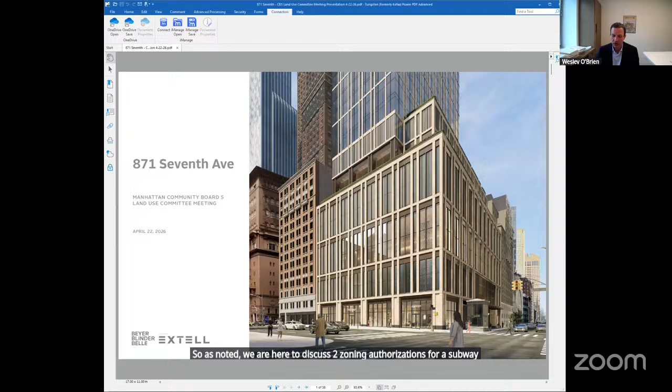So as noted, we are here to discuss two zoning authorizations for a subway improvement bonus to facilitate the construction of a mixed-use hotel, retail, and residential project at 871 7th Avenue, former Wellington Hotel site.

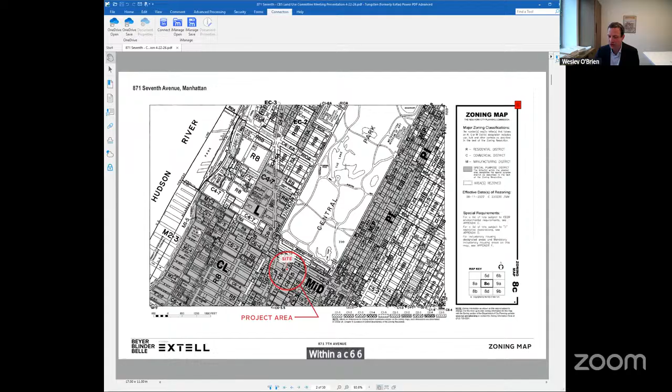The site is located at the northeast corner of the intersection of West 55th Street and 7th Avenue within a C6-6 zoning district within the Theater Subdistrict of Special Midtown. The site is outlined here in red, and it's part of a broader zoning lot outlined in blue that includes portions extending into the mid-block C6-6.5 district.

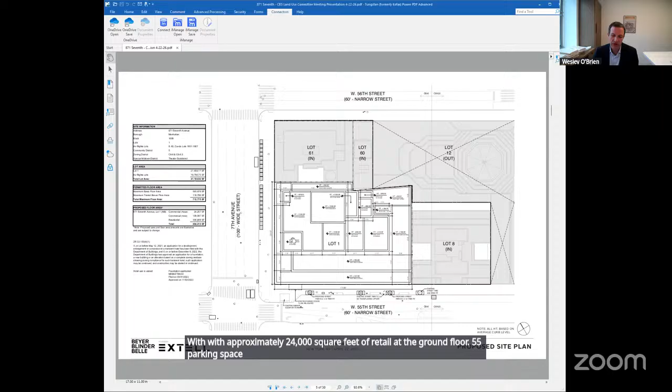We have a site plan here. The development site is shown in white at Lot 1, with the remainder of the zoning lot shown as Lots 8, 60, and 61. The proposed project will be a 484,000 square foot mixed-use building with approximately 24,000 square feet of retail at the ground floor, 55 parking spaces at the second floor level, 159,000 square feet of hotel use in the lower portions of the building, about 156 rooms, and 301,000 square feet of residential use in the upper floors, approximately 130 units. I'll pass it to Max to describe the project program in more detail.

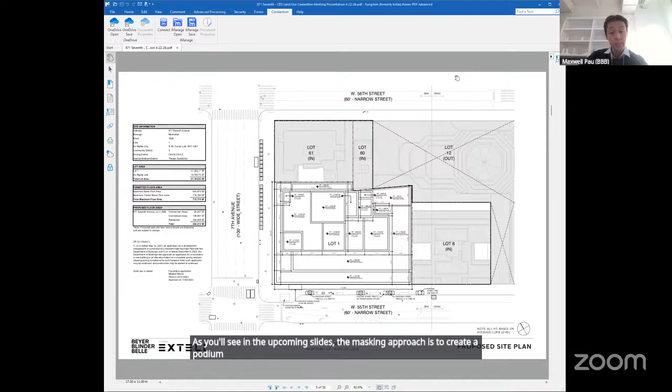As you'll see in the upcoming slides, the massing approach is to create a podium at the street wall that relates to the buildings directly around us, and then shift the upper portion of the building to the west towards 7th Avenue and away from 55th Street. Let's go to the next slide.

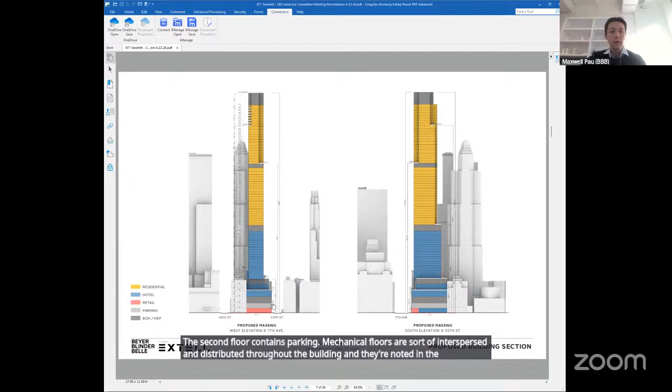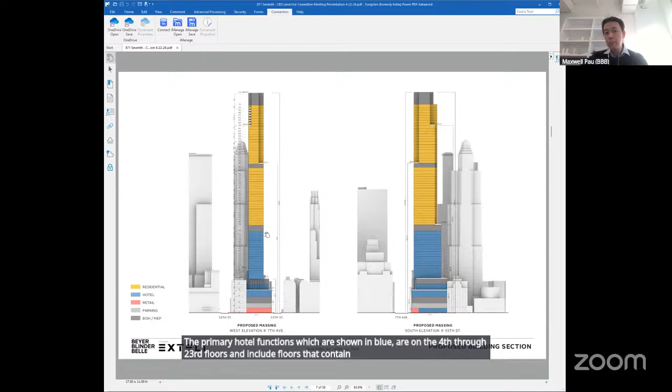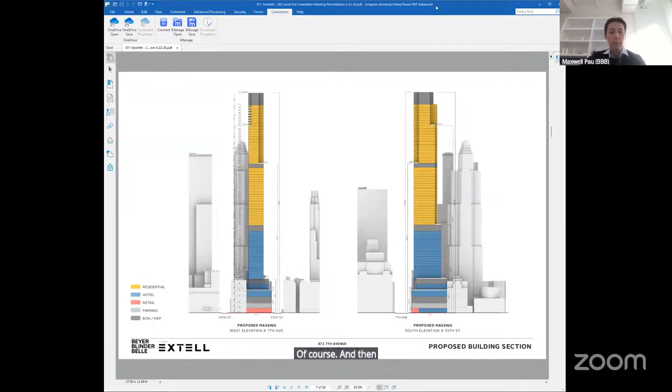Mechanical floors are interspersed and distributed throughout the building, noted in dark gray. The primary hotel functions, shown in blue, are on the 4th through 23rd floors, including ballrooms, meeting space, upper lobbies, amenities, food and beverage spaces, and hotel rooms. Above the blue hotel stack, residential uses run from the 25th to 70th floors in yellow, including amenities on the 47th floor. The overall building height, including the bulkhead shown in gray at the top, is approximately 1,050 feet.

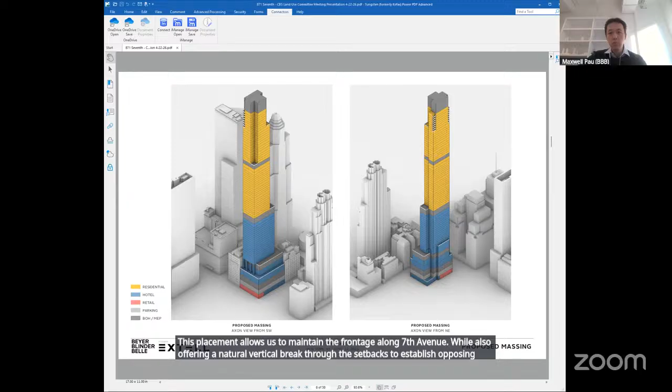Next slide. Showing the same stacking in axonometric form, we can see the building massing and how it steps in as it rises into a rectangular form. This allows us to utilize all of the setback roofs as outdoor space as the building steps back and goes up. The main building mass steps back from 7th Avenue 10 feet, steps back from 55th Street approximately 40 feet, and steps away from the easterly property line by 50 feet on the residential levels. This placement allows us to maintain the frontage along 7th Avenue while offering a natural vertical break through the setbacks to establish a podium relating to the height and massing of existing buildings to the north and east along the street line, as shown in the diagram on the left.

Next slide. We can see this podium relationship a little better in this view on the corner of 7th Avenue and 55th Street. Our design intent is to create a crisp, contemporary, and timeless building for today and its uses, one that has order and a bit of refined restraint in its articulation.

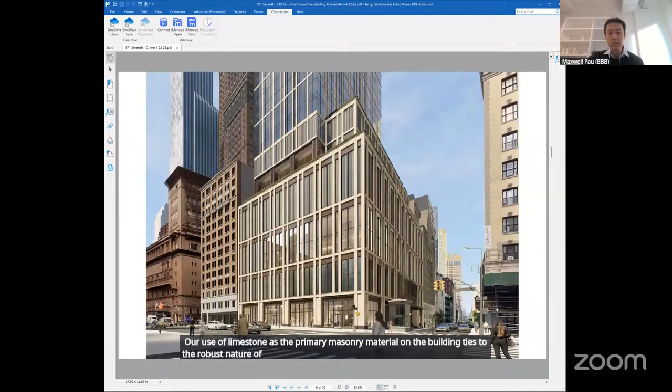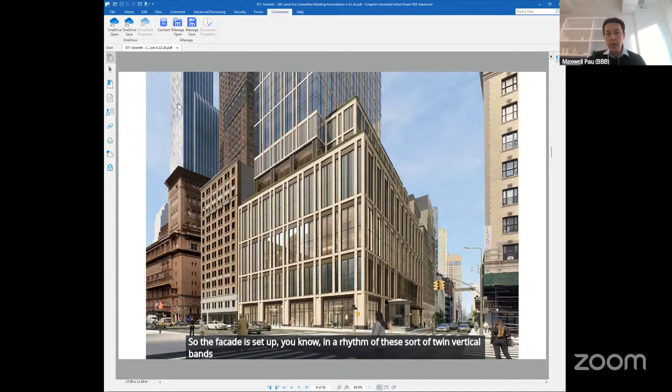Our use of limestone as the primary masonry material ties to the robust nature of the buildings around us and picks up the warmth and tonality of the stone and brick buildings directly adjacent to us. The facade is set up in a rhythm of twin vertical bands with horizontal banding that rise up the building from the base, with a higher density of limestone at the base balanced against maintaining windows and transparency, which we think is really important. We blend that warmth of the limestone with bronze-colored metal accents at the storefronts, with some of that materiality carrying up the building on the amenity levels.

As discussed, turning now to the zoning actions, we are seeking 2 zoning authorizations. First, to grant a 118,000 square foot bonus in connection with subway station improvements, which we will discuss in more detail. Secondly, we are seeking an authorization to modify bulk regulations, specifically to modify the daylight compensation requirements, and to allow for 18,000 square feet of floor area generated in the C6-6.5 district to be transferred into the C6-6 district portion of the site.

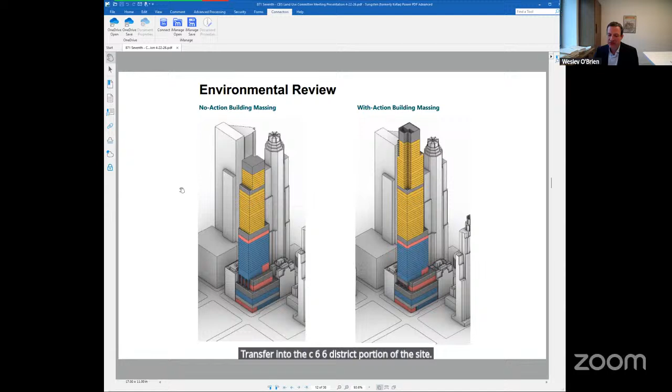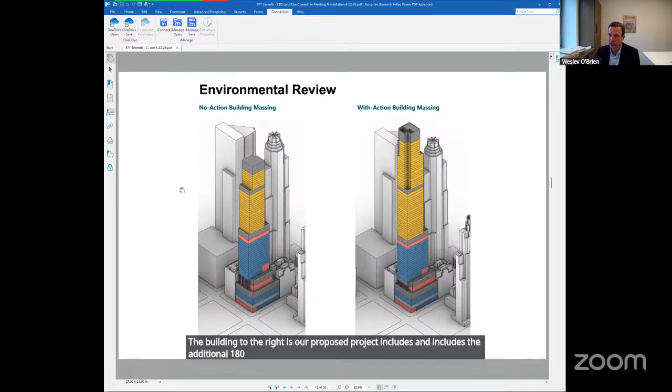An environmental assessment was prepared to study the potential impacts of the authorizations we are seeking. The building shown to the left is what can be built entirely as-of-right, without the authorizations. The building to the right is our proposed project, including the additional 118,000 square feet, the 20% bonus. The environmental assessment compared these two buildings, considered the effects, and confirmed that the actions would not result in any significant adverse environmental impacts.

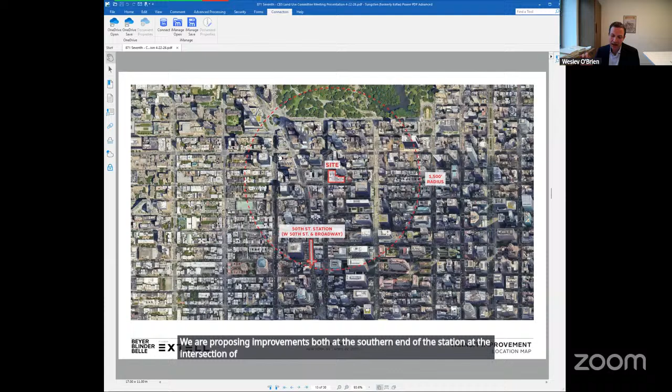Focusing now on the subway improvements, you can see the project site in the center of the circle, and the station at 50th and Broadway, which is within 1,500 feet of the project. We are proposing improvements both at the southern end of the station at the intersection of Broadway and 50th, and at the northern end at the intersection of Broadway and 51st.

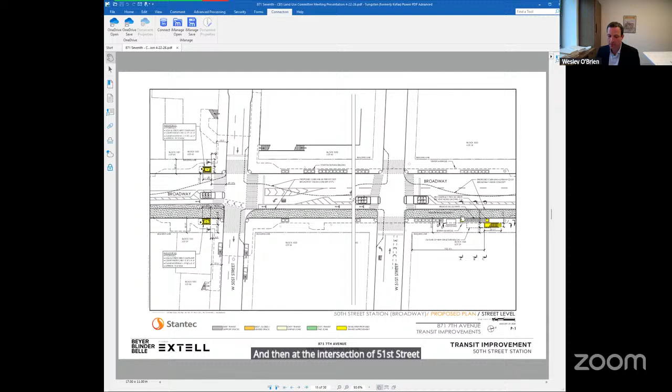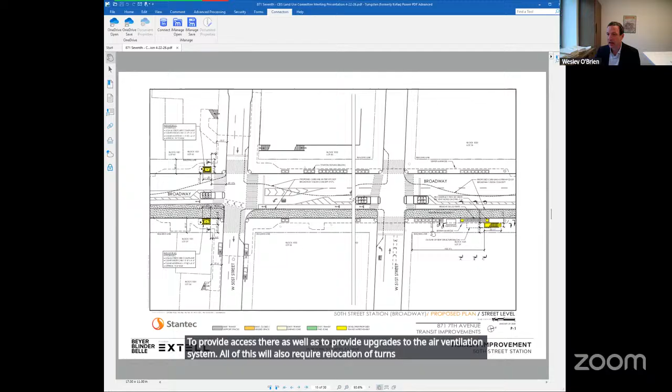This slide shows the improvements we're proposing at ground level in yellow. We're proposing a new elevator to access from the street to the platform at the northbound side, and another elevator to provide access from the street to the southbound platform. Then at the intersection of 51st Street, the northern end of the platform, we're proposing new stairs to provide access, as well as upgrades to the air ventilation system. All of this will also require relocation of turnstiles and construction of elevator machine rooms.

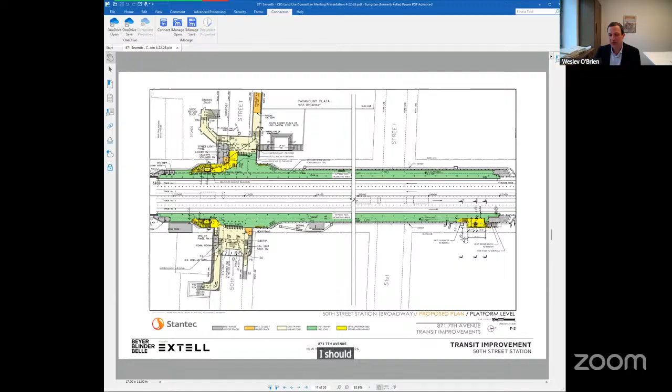I should note that as a result of this work, the station would become handicap accessible. An additional point, although this element is not technically part of the bonus, I will note that the project is also providing on-site station improvements.

You can see here the 57th Street subway station entrance for the N, Q, R, and W. This station is already accessible, with a new elevator shown at the left. However, there's a pinch point where two gentlemen are walking, right in the middle between the elevator and the stairs. So as part of the project, that stair will be moved into the property line, thereby preserving the full width of the sidewalk for pedestrians.

That is our proposal, and with that, we're happy to take any questions. Thank you. Yaron, would you like to lead us off?

I'll start. Can you give us a sense of how many stories this 20% bonus translates to? Like what does it roughly make up in stories? Sure, the as-of-right project would be 53 stories, and the proposed project is 71 stories. So 18 stories, thereabout.

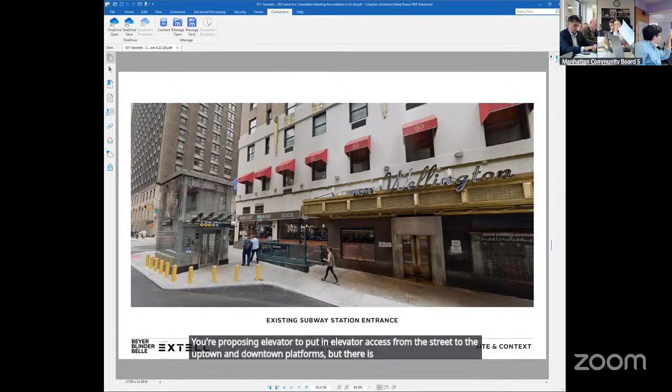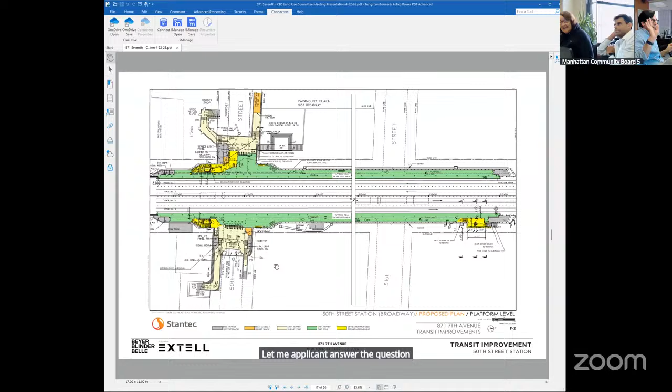You're proposing to put in elevator access from the street to the uptown and downtown platforms, but there is already an elevator? No, for the station. Sorry, that's for the one train. Okay, sorry, got it, understood. Thank you. Right, let the applicant answer the question. No, it was a stupid question. I appreciate everyone telling me. Applicant's job, not us, not in the room.

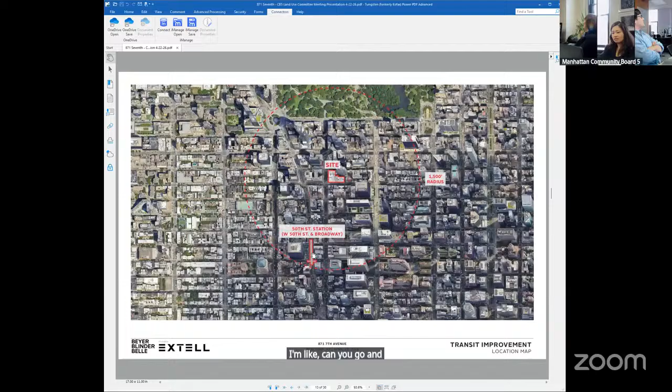Can you go to the bottom floor design that you showed, or the street level? The bottom floor site plan or the street level view? Floor plan, yeah. Oh, that, there we are. The one that has, sorry, that one, yes.

So if we're looking at this correctly, there are three curb cutouts here, one for the loading dock and two for the driveway, in very close proximity to each other. Can you talk through why, or your thoughts around that, and any potential there might be for disruption to the pedestrian experience with that?

Sure, Max, do you want to take the initial point? Sure. So the driveway curb cuts for the vehicular entrances are one-way curb cuts, about 14 feet long, so we're trying to limit that. One of the things we looked at early on was a two-way curb cut, but we were concerned about potential conflict, since there's more movement with two-way. You'll notice the movement is in a clockwise direction, which is a little counterintuitive, but working it through with our traffic engineers, this was the safer approach, because the ingress movement with the street going westerly on 55th meant there was a direct sight line to people going in and out of the subway station stairs. So the idea was to have the ingress come in on the west side and the egress come out on the east side, further from the subway station. The curb cuts are 14 feet one way, and the loading curb cut is slightly wider to meet zoning requirements.

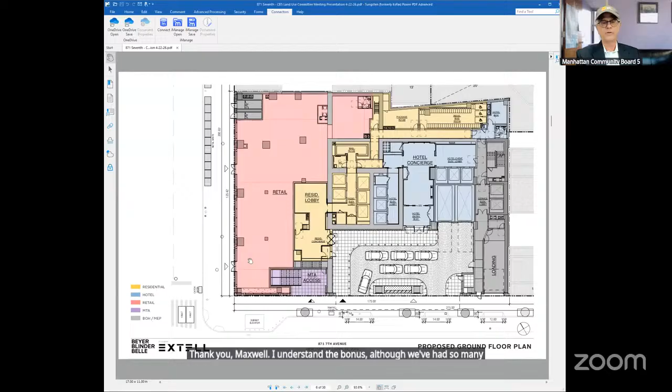That technically is not part of the bonus, but that is a public benefit. Thank you. I understand the bonus, although we've had so many problems with these bonuses when it comes to elevators with private developers. They put them in and then they go into disrepair and are out of service sometimes a month at a time. But the question I'm asking is not about the bonus. I'm asking whether there is any space within the project for community or public use. No, beyond the MTA space, there's not further public space.

Other questions from the committee? Mike? To ask about the hotel portion, you said there was a ballroom. How big is the ballroom? Or is there any other meeting space available?

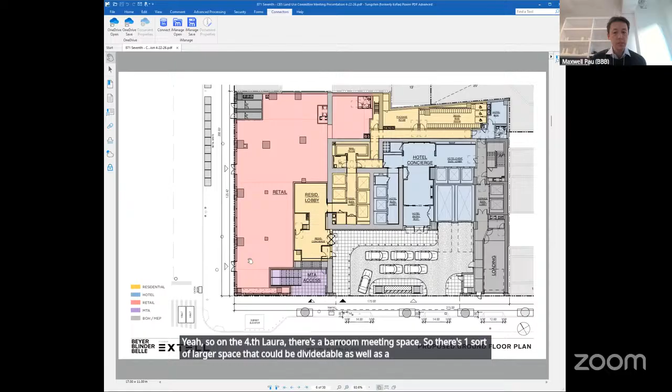Yeah, so on the fourth floor, there's a ballroom and meeting space. There's one larger space that could be dividable, as well as a couple of meeting spaces on that level, or sorry, the third floor. And the ballroom, I believe, is around 3,400 square feet. 3,400? That's what you said?

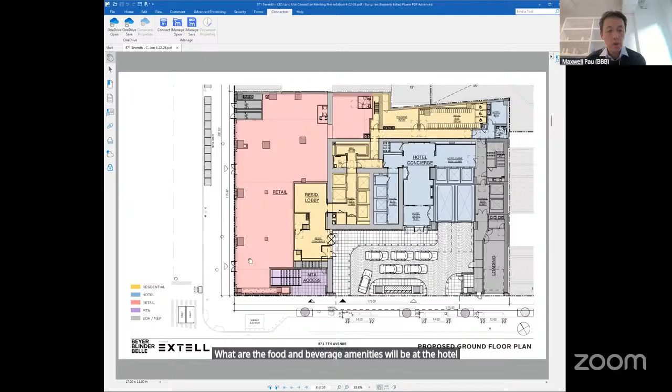Yes, he said that. Okay, and you said there was other food and beverage. Is there a restaurant or what other food and beverage amenities will be at the hotel? Yeah, there will be food and beverage spaces associated with the hotel that you would typically find in a lobby area. So that's within the hotel portion that was in blue.

Okay, so just a lobby, grab and go, is that what you're talking about? No, there'll be a restaurant on the 5th floor. How large is the restaurant on the 5th floor? Let me check. It's about 2,200 square feet. Okay.

That's it. Any other, Murnau? Who will be in charge of maintaining the elevator on the 50th Street station? MTA will be in charge of maintaining it. Extell will pay them an amount in order to fund that maintenance work. On an ongoing basis? Yes. And do you know how much that amount is? Has that been negotiated already? It is not set at this point.

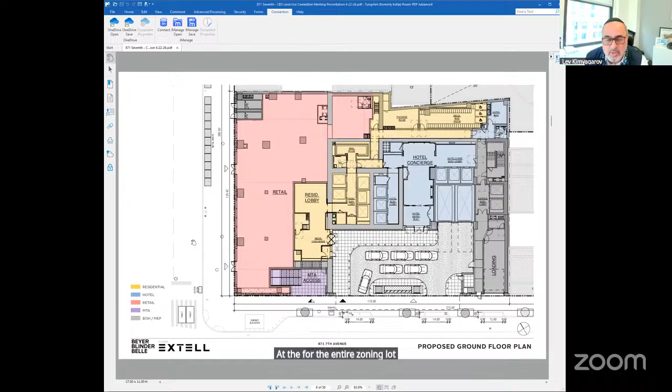And how big is the zoning lot? The zoning lot is 41,104 square feet. Okay, good. Mike, you wanted to ask another question? And the property is how many square feet? So the zoning lot, does it include adjacent properties? It does. The development site is 21,400 square feet. You see lot 1, and the zoning lot additionally includes lot 8, 60, and 61. And that equates to 41,000 square feet. Correct. Got it, okay.

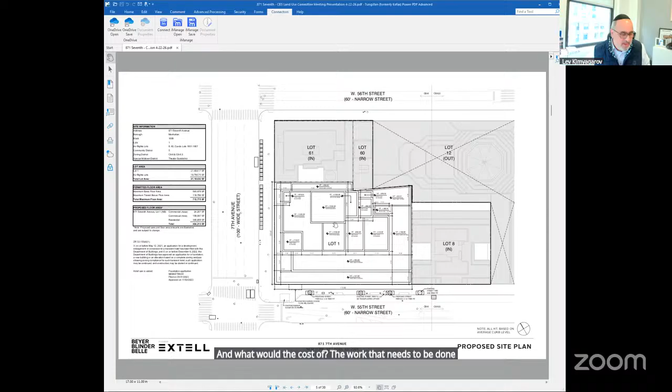And what would the cost of the work that needs to be done with MTA? Have you guys got a number? I'm just curious. No, we do not have the number yet. Got it.

Anything else, Lev? No. Okay, Michael. I want to add something. I like the fact they're moving the entrance of the subway into their building. I think that's pretty nice. Okay, Lev, we'll come to comments later, this is just questions for now.

Michael, question. The subway entrance on 55th Street, what is the current width of the stair now, and what is the proposed width of the stair that will be inside the property line?

It will be 9.5 feet. I don't believe I have the existing width, but it's comparable. 9.5 feet wide? Yes. Okay.

Do you want sort of questions? Any other questions from the committee? Well, don't do Kevin's question. Kevin is on the board, so Kevin can participate in business session. Kevin, do you have a question? Yeah, just I have a question.

Will the developer receive a tax credit as part of this exchange for the bonus floor area for the transit improvements? And if so, what is the value of the tax credit? No, at least not that I'm aware of.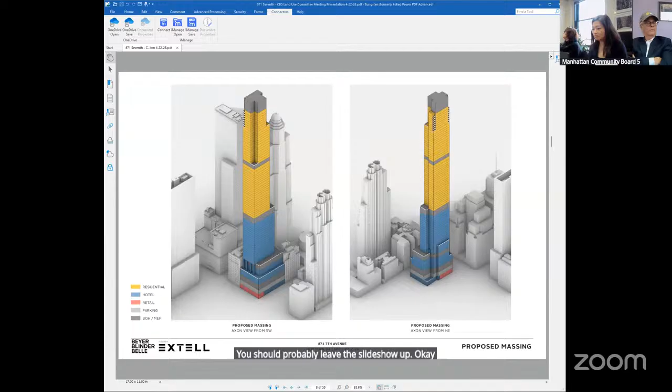Can you see that screen? All right, so the base of the building -- can you show the slide, please? Sure, I'm pulling it up. Great, thanks. You should probably leave the slideshow up until we're finished. Thank you. So the base of the building -- the first setback happens roughly after the fourth floor, but the base of the building really goes up to 6.

Okay, so the base takes up as far as the front and its relationship to the sidewalk -- there's no setback from the existing in the base, except for that area to get into the subway or the covered area to get into the building on 55th Street, correct? Correct.

Okay, so that was a question. So that's 6 floors. It looks taller.

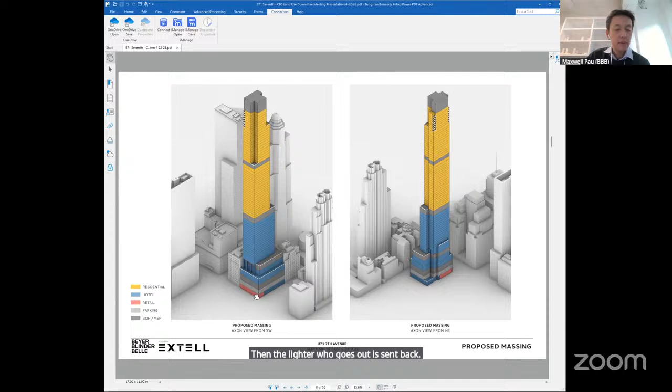It is 6 floors. Then the lighter blue is set back how much? I'm sorry, can you repeat that? Okay, the lighter blue section -- is set back how much from the darker blue, from the bottom section? So presumably that's where the restaurant is and you'll have a terrace and all that, correct?

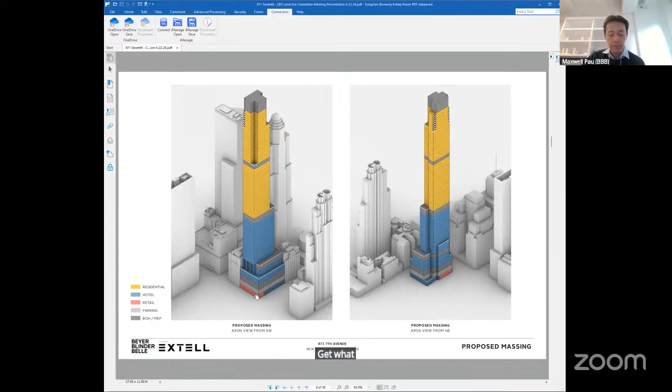Yeah, so we've got the tower portion relative to the street line at 40 feet on 55th Street. 40 feet. And it's 40 feet back from 55th Street.

And what about from the building to the east of that, which happens to be where I live? And does it go to the lot line? Yes, the podium goes to the lot line. So those 6 stories go to the lot line.

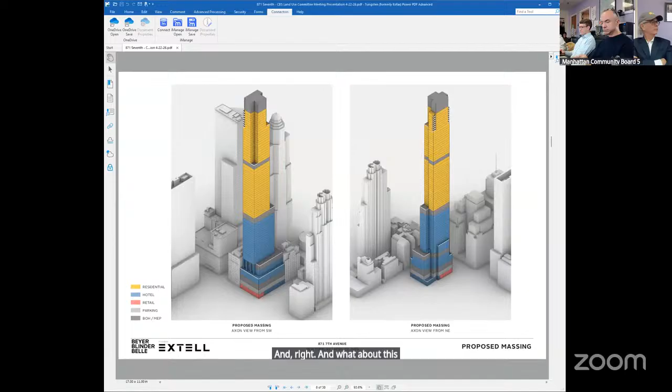And what about the next, the lighter blue, the royal blue, where the setback is? Yeah, so that sets back another approximately 29 feet. Okay, does that go to the lot line? It sets back 29 feet from the lot line. Oh, from the front and the side? From the side -- the setback building to the lot line is 29 feet. There's some crosstalk here, so ask your question.

My question is, where do the setbacks occur and how many are there? Can you just run through that through the whole building? Sure, I think this might be an easier diagram here.

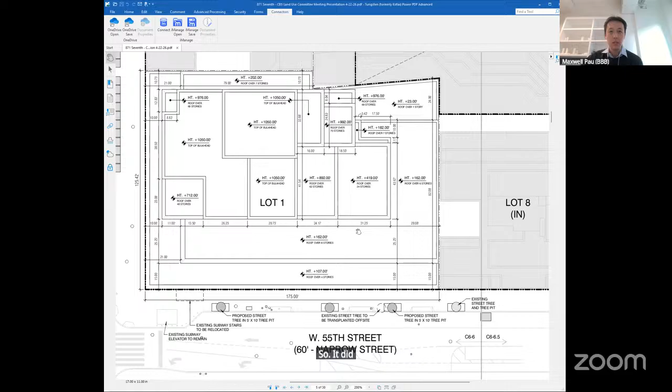So if we're going from the eastern lot line, you point that out, Wesley. So that first setback above the 6th floor is just a shade over 29 feet. Then that next setback to the residential portion, the yellow portion, is another 31.23 feet. So it adds up to the dimension. Okay, no, that answered that question.

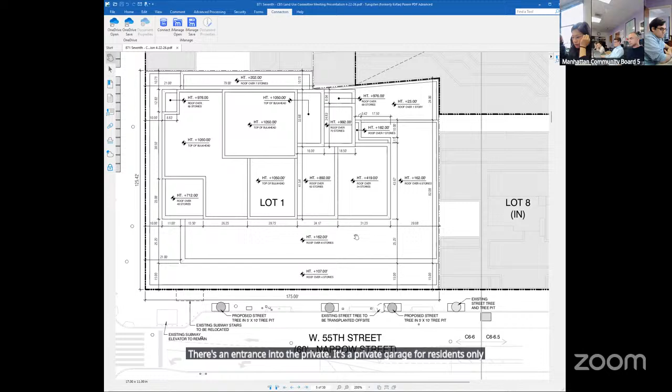And then my next question was on the entry side, the north side of 55th Street, there's an entrance into a private garage for residents only? It's an accessory garage for the building. Right, who parks there? That would be both for the hotel and residential use.

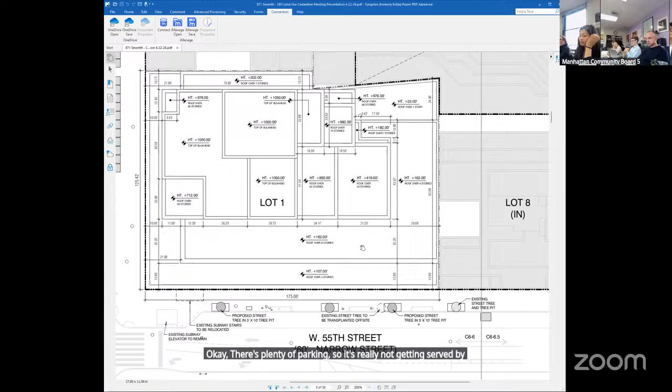Okay, only. There's plenty of parking garages, so it's really not a concern, but I wondered about in and out, how much. And then there's an entrance to the hotel there, the entrance to the subway, and then a way for access for taxis and limousines or black cars. It seems like a lot on that short space.

With the subway, are you making a comment or are you asking a question? I'm asking a question. Okay, it sounds like you're making a comment. What's the question? The question is, on that 55th side, there's access to the private garage, access to the subway, and access to the hotel. And there's still a place for livery drop-offs and pickups. Is there enough space for all that?

Yes, what you can see here is there is room for 6 reservoir spaces that have been provided. So that is sufficient to serve all of that.

Okay. And then I have one other question. How do you come up, I don't know how it's decided that a subway so far away gets the benefit when anyone within a block radius is likely to use another train, because there's about 5 or 6 closer. For example, the 7th Avenue subway has no handicap access, and it's huge, a vital subway. People use it to go to Kennedy in addition to coming in on 3 or 4 subway lines, going north, south, east, and west, and that has no handicap access.

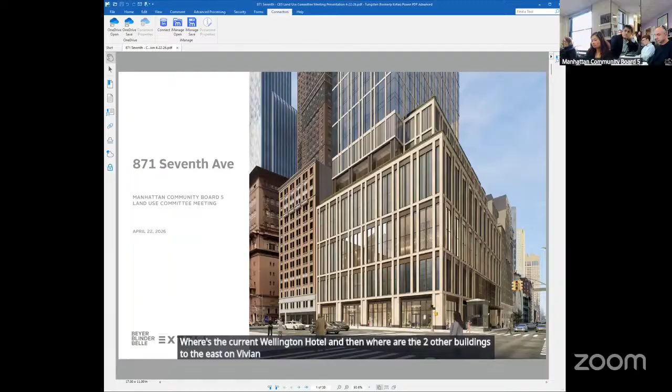Can you point out on this diagram, or maybe on the one where, whichever is easier, where's the current Wellington Hotel, and then where are the two other buildings to the east on 55th Street? On your diagram, not on the existing one. You don't have an elevation of the adjacent buildings and this new building, do you? That would be helpful. No, this one here.

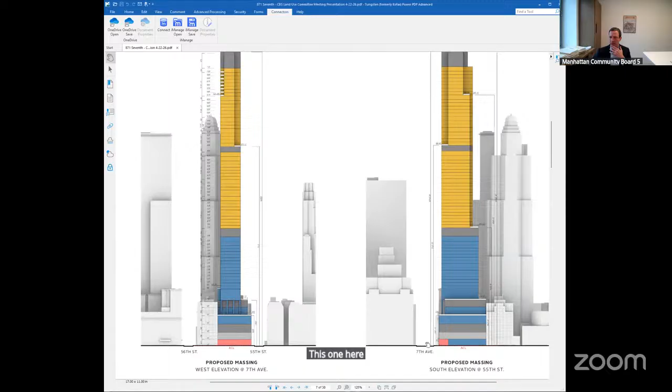Okay, so that's 55th Street looking at, correct? Yes, that's 55th Street, looking up north of 7th Avenue. So where is the current Wellington Hotel, and then where are the two buildings that are east of the Wellington Hotel that you're about to demolish?

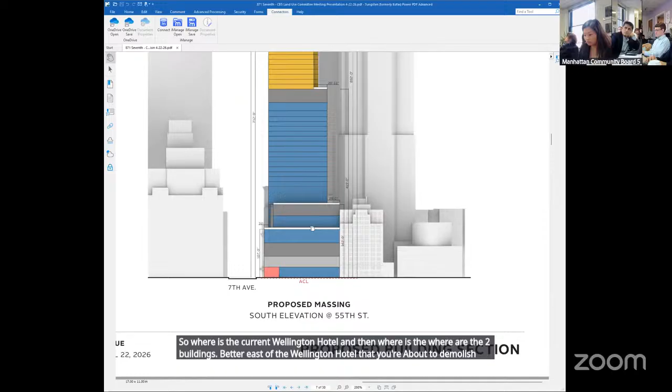Right, so the Wellington Hotel includes those two buildings, so they end right here at the same eastern edge. They appear as though they are two separate buildings, but they're actually internally part of the Wellington. What is the address again? 147 West 55th Street is the farthest east that's being demolished on the block. So, well, let's move on from that.

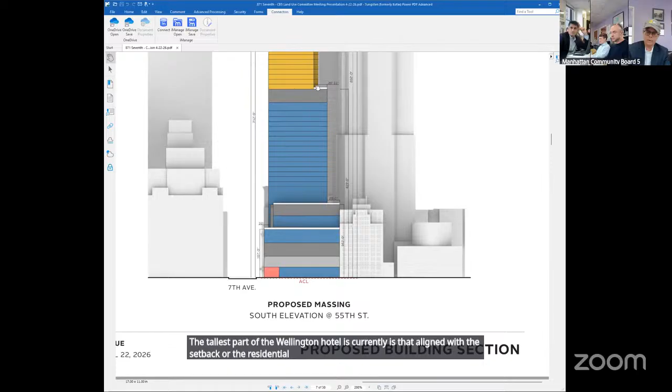My fundamental question is where the tallest part of the Wellington Hotel is currently, is that aligned with the setback for the residential tower at that point?

Max, do you have that figure? I don't have it. Right here, we can take a look at it. I mean, we didn't design it that way to align with it.

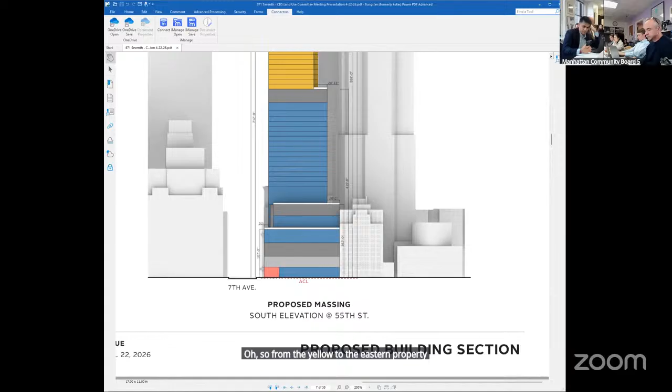How many feet back from the easternmost point on the lot is the setback where the residential tower begins? From the yellow to the eastern property line, correct, it's 60 feet.

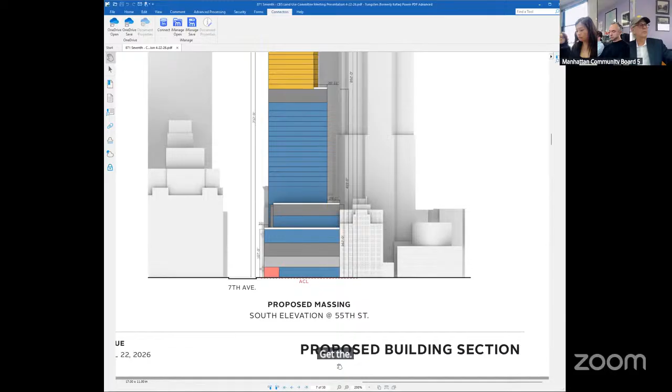That's not even close to where the current high part of the Wellington Hotel is, because you've got two other smaller buildings to the right. 147 West 55th is 75 feet wide, and then 151, I don't have the precise dimension, but it's probably another 30 feet. So give me those numbers again. 30, 75. 75 and 30 - so it's 105 feet from the current height of the Wellington Hotel.

And then you're saying the setback is only 60 feet, so it's going another 45 feet. Is that correct? That's approximately correct, yes.

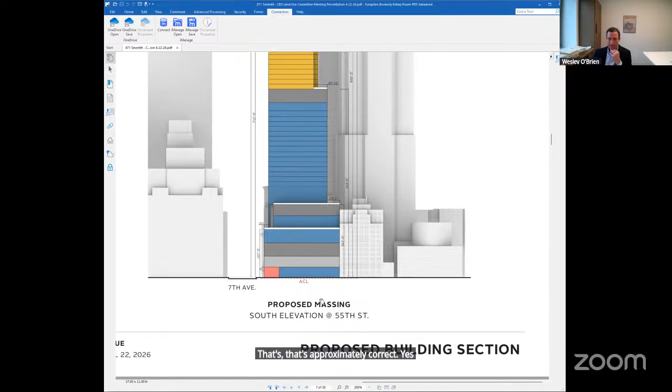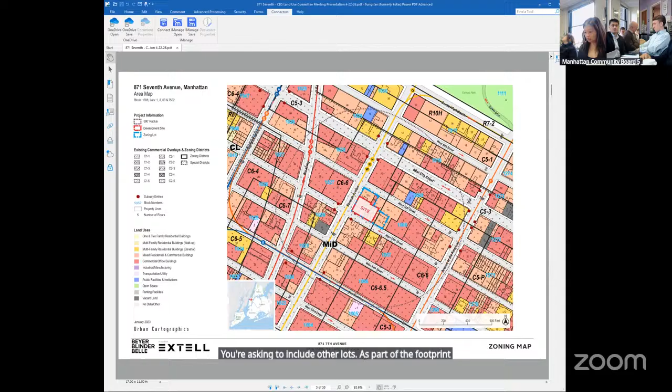My second question is, I don't understand the regulation about you asking to include other lots as part of the footprint to then maximize the total capacity of this building. Where are those lots that you're including? The zoning lot includes lot 8, lot 60, and lot 61.

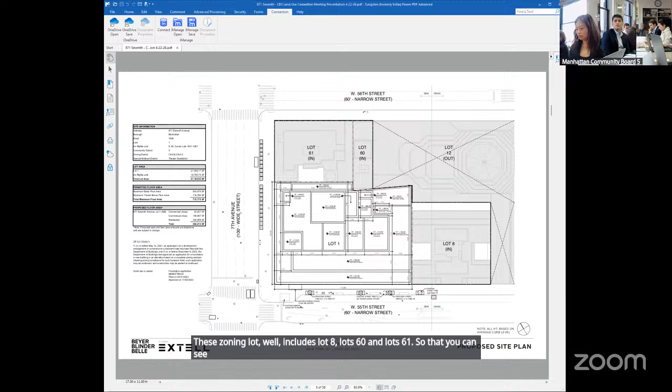And where are those on your diagram? Can you blow it up? I can't see it, I'm in the back of the room. Sure. Lot 8 is to the east. What's Lot 60 there right now, to the north? That is the condo building.

Sorry, that is mixed-use residential and commercial building. Okay, that's not being demolished. So how do you get to include that lot into your total capacity? Yeah, a zoning lot is not necessarily one-to-one with a property like a lot. Okay, what does that mean?

Do you want to explain what a zoning lot is? Sure. The zoning calculations are done on the basis of a zoning lot, which can include and typically does include multiple tax lots. So these are developed or redeveloped as a single zoning lot, and all the DOB filings and zoning calculations are done on the basis of these four together.

So is your application today asking that those zoning lots be included? No, they already are. The zoning lot is - these tax lots are merged into a single zoning lot on an as-of-right basis. So those zoning lots are already included - that is what's giving you the right to go up to what you said, 53 stories, if you were not granted this application you're making today?

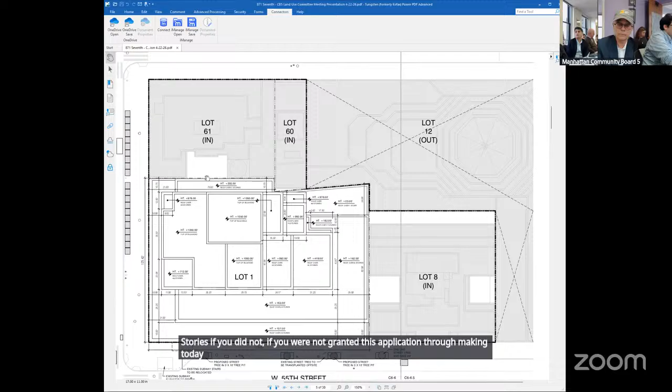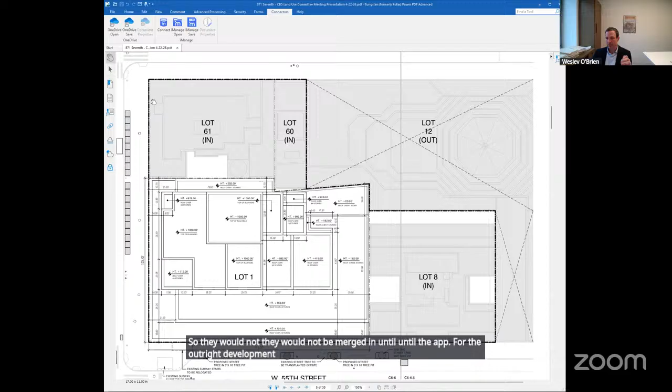Yes, technically, well, all four of them are used to generate the bonus. Technically, these two are not in the as-of-right program, so they would not be merged in until the as-of-right development. Okay, and so the zoning lots that you've included are the ones outlined in black, to the north and to the east of the site, okay.

All right, those answer my question.

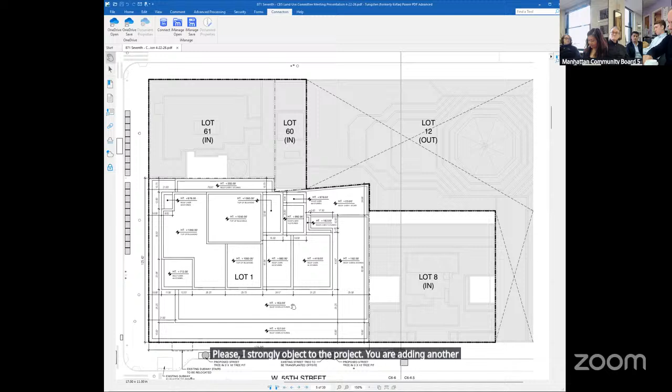I strongly object to the project. You are adding another super tall building into Midtown. It is within probably 30 feet of City Spire, going all the way above City Spire. You're going to block light, you're going to block airflow. Half the apartments in City Spire are going to basically be looking out onto an air shaft with this building.

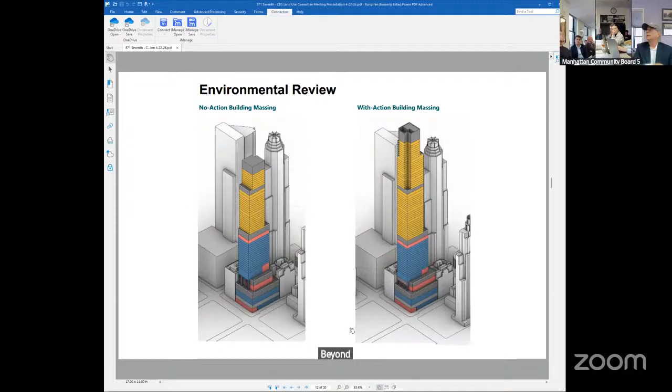And I think it is beyond comprehension that a building can be placed, a super tall can be placed on the same block. I believe that the foundations actually abut one another, that this super tall building - it's not like it's across the street, I get that buildings can be put across the street - this is being put exactly on the same lot, completely adjacent to City Spire. And just the light, the airflow, and lack of that.

Thank you. My name is David Akalis. I'm president of the West 50s Neighborhood Association. I was a member of community board for a number of years. I'm reading on behalf of myself - it's a statement for me. I've lived on West 56th Street for over 50 years. I was born and raised here in Manhattan.

Let me state that for the last 20, 30 years, the New York real estate industry has been out of control. It is time for the citizens of New York City to take back what no one industry should control. The real estate industry has made so much money that they have been able to buy whatever they want, and no one has been able to say no. This makes Extell a bad neighbor.

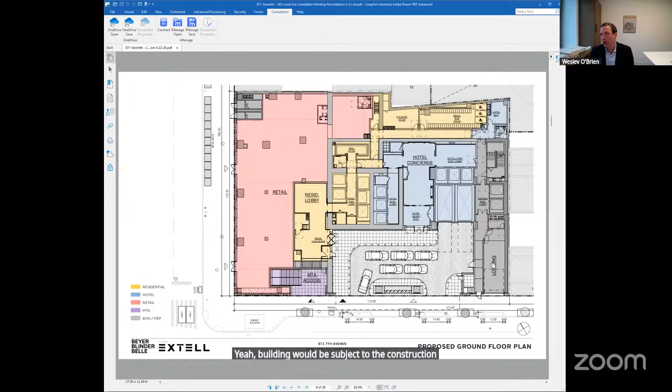And can we have guarantees, if this construction is approved, that there will be no overnight construction, no weekend construction? Yeah, the building would be subject to the construction rules, which typically do not allow, except in special circumstances, overnight or weekend construction. There are some instances like concrete pours, which have to run longer, but that is not the plan.

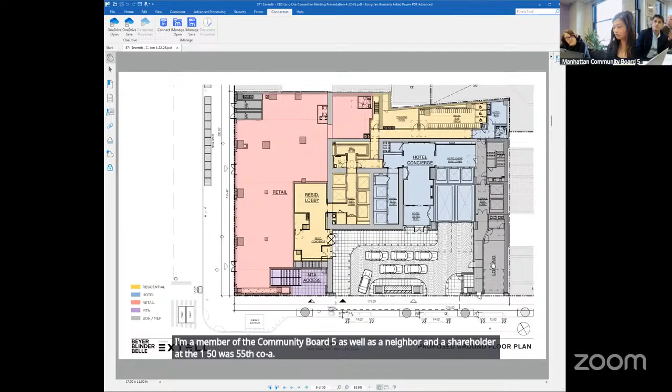Thank you. Okay, Kevin? Thank you. For those people that don't know me, my name is Kevin Thompson. I'm a member of Community Board 5, as well as a neighbor and a shareholder at the 150 West 55th Co-op. Before I get into my comments, I just want to acknowledge and commend Extell for how they have cleaned up that site a little bit. It has been a disaster for a number of years, and it's cleaner than I remember it being in recent times. So we really appreciate that, thank you for that.

While I recognize that this committee is talking about a very specific focus - that exchange of floor area for transit improvements - I'd like to raise a few quality of life concerns that I hope you'll incorporate in any resolution you adopt this evening. My concerns are really focused on the day-to-day reality that my neighbors, workers in the area, and small businesses along my street will face throughout this entire ordeal. First, we're looking at a demolition and construction project of enormous scale.

This building is going to be just 6 stories shy of the height of the Chrysler Building. It will rival the buildings on 57th Street. It's really big and way out of scale for the location. And while projects like this may ultimately bring some long-term benefits, I don't know what they'll be, I'll leave that up to people to debate. I'm interested in the short and medium-term impacts that are troublesome and very real for my neighbors.

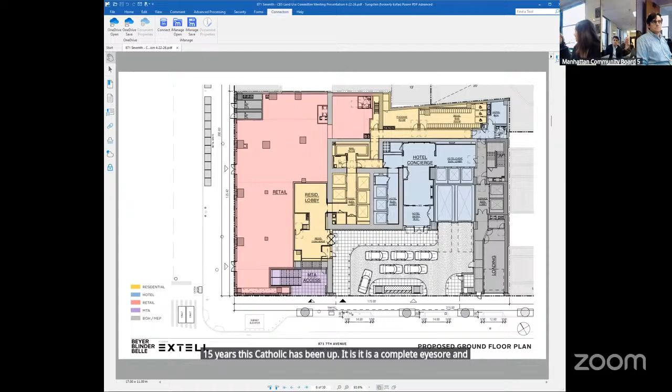No, it's been 15 years - 15 years the scaffolding has been up. It is a complete eyesore and too many problems to even go into here tonight. But I know Extell has the ability to lean into this conversation and work with the community. It's past time we clean up that intersection, and I appreciate Extell working with the community. Thank you, Madam Chair, for the time.

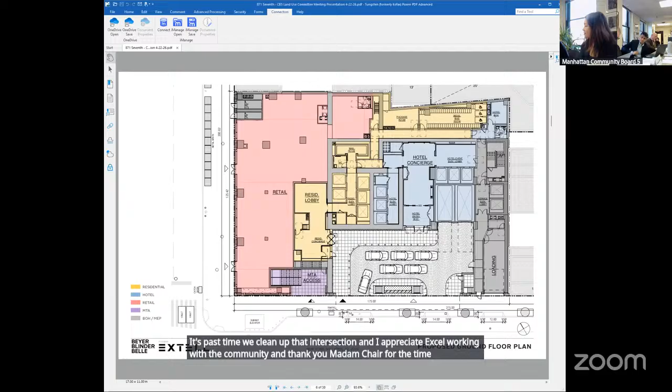Dexter - yes, I'd just like to say that the additional 118,796 square feet of land you're asking for, which comes out to 2.73 acres, is what's allowing it to abut City Spire. It started with the Wellington just being a really tall tower, which is one thing because it's so far away from another super tall building.

But now with that addition you're asking for, plus putting up the handicap elevator, all that extra land gives 147 West 55th over to you, which then abuts City Spire - meaning it is literally blocking a whole building. 73 stories of tenants will not be able to look out their window and have light. It's basically right next to City Spire. That's my biggest objection - not that it's so high.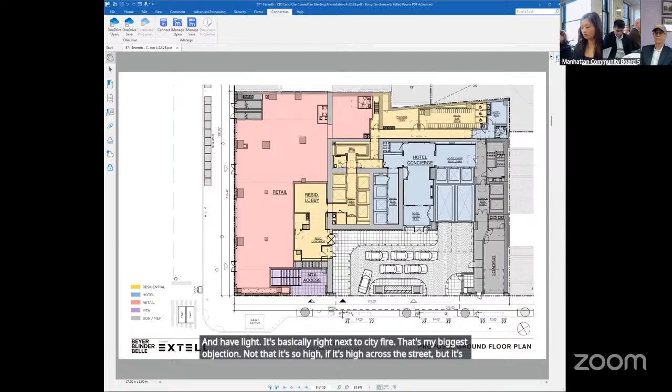If it's high across the street, that's one thing, but if it's so high that you could hand a cup of coffee over to your neighbor, you're living in a fishbowl - that's ruining our quality of life. I'm making this comment for all the tenants living in City Spire who are against this and would not like to see it go forward.

Okay, and our final public speaker in the room is Andrea. I will be brief. I'm Andrea, also a community board member and Catherine's neighbor in a different building.

I second everything he said about the homeless encampment on the block as well as the long-term scaffolding issues. We would very much appreciate Extell using your influence in this industry to better the quality of life on this block. My neighbor and I also have concerns about the noise and safety issues that this project might bring to the neighborhood. I want to hear if you have a plan for ensuring the safety of the neighborhood, as well as how you are going to minimize the noise during this project.

Also, regarding the subway station right outside the Wellington Hotel, will there be any point in time where residents won't have access to use that entrance? Thank you.

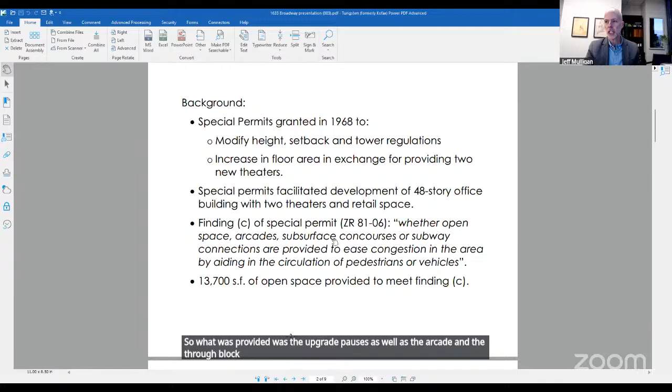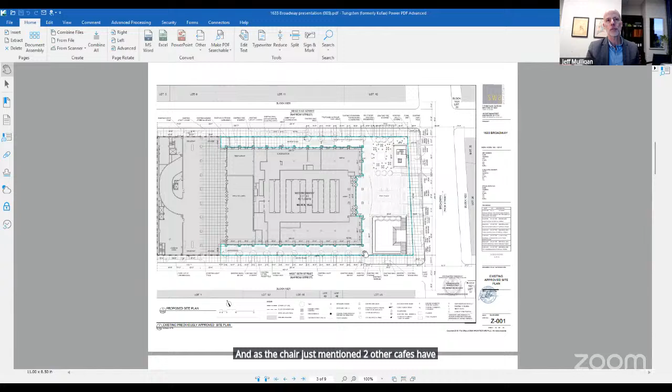As the chair just mentioned, two other cafes have been approved at this location. Those two were on 51st Street. So this is a new location on 50th Street.

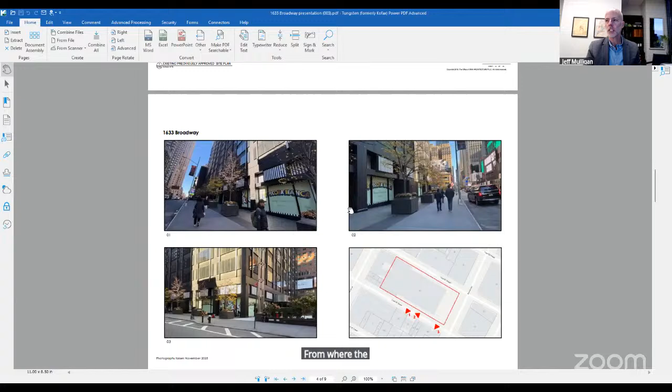Just to take you through some photos, this is 50th Street, where the proposed cafe will be located. It will essentially be located where the pavement becomes a darker color. So sidewalk obviously will be maintained, but the cafe will be located from where the planters are to the building facade. So this is 50th Street.

A couple of photos showing the plaza along Broadway. And then some photos showing, on the upper left, this is the plaza fronting on Broadway, and then two photos of the narrow portions of the plaza along 51st Street.

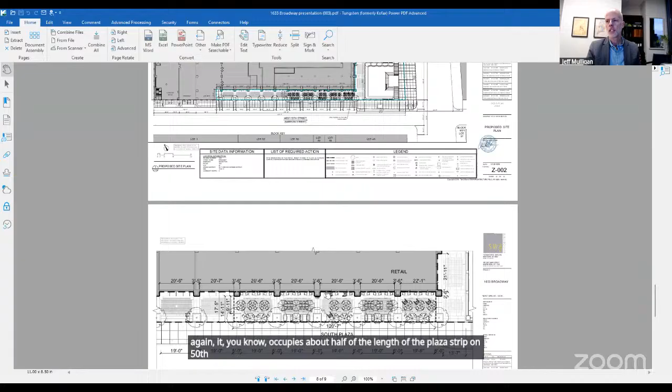This slide shows the proposed cafe here on 50th Street. Again, it occupies about half of the length of the plaza strip on 50th. Zooming in a bit, again, the tables and chairs are between the planters up to the building facade. And of course, it's seasonal, so this is how it will look without the tables and chairs.

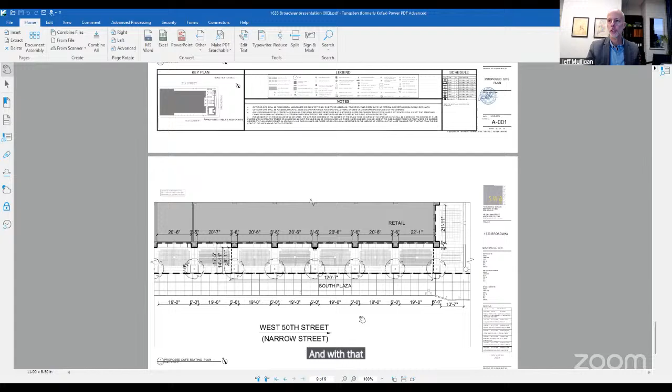And the request, as is typical for open air cafes, is for a 3-year term. With that, I'll turn it over to the committee and happy to answer your questions.

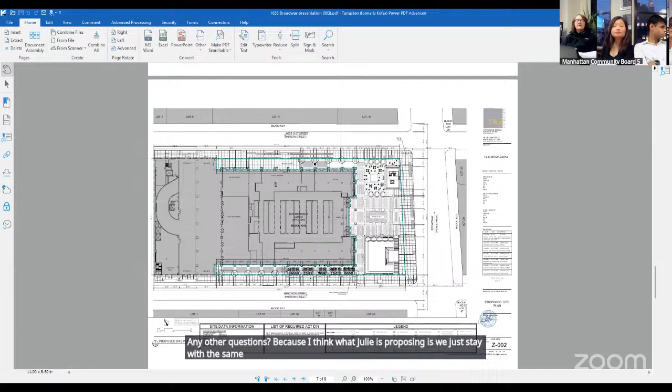Any other questions? Because I think what Julie is proposing is we just stay with the same deny-unless motion, with the same conditions, because it's a POPs and we require these things. I second that motion. Okay, great.

So all in favor? Yes. We're all... oh okay, great. I think you need to vote. No, you need a roll call, can't vote by hand.

Thank you very much. Okay, thank you. So 9-0, but that's quorum, right? Yeah, yep, that's quorum.

Okay, so we're done with that. We have something called Rethread, which is a presentation from a nonprofit, newly forming nonprofit called Rethread. They're seeking support for city council funding. They would like our letter helping them. It's a nonprofit initiative focused on strengthening New York City's fashion and costume industries through education, skills training, and the acquisition of stable, affordable production space in the Garment District. Our lead committee member to this is Michael Greeley. Michael, do you have anything you want to say, or do you just want to go to the presentation?

Let's start the presentation. Okay, so Fred, you're up. Hi, tell us about what you have. Hello, thank you all. I will pull up my screen and share, but we have had some very positive conversations with a lot of folks in regards to this. It came as a direct correlation from MSMX, which you guys are all very familiar with, trying to find stable and affordable space for the costume and fashion industries. Adam, do you want to speak while I get this pulled up?

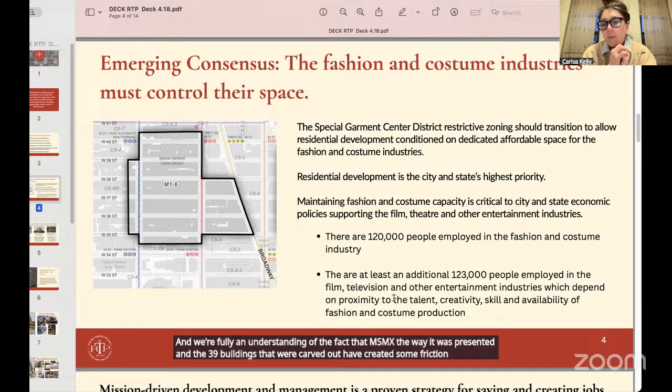We fully understand that MSMX, the way it was presented, and the 39 buildings that were carved out have created some friction, and we're here to help solve and alleviate that. We're seeking between 300,000 and 500,000 square feet that we hope to be below market rates, with a nonprofit-driven management structure that Adam can also speak to, since there are quite a few among the cities.

What we're trying to do is expand a well-proven model. On the industrial side, you have the Greenpoint Manufacturing and Design Center, the Brooklyn Navy Yard, Evergreen - nonprofits that manage industrial space. I'm on the board of the Navy Yard, and one of the benefits of that management structure is the curation of tenants. We look for high road tenants - the board of directors votes on every single tenancy to ensure there's synergy between the companies and that they work with the community around employment.

In affordable housing, who builds affordable housing in the city? Nonprofit organizations have built 123,000 units of affordable housing, so we're trying to apply that model here. And in your district, on your doorstep, is Building for the Arts, which has helped revitalize Broadway theater through nonprofit management of space. We're trying to use those models to solve this problem.

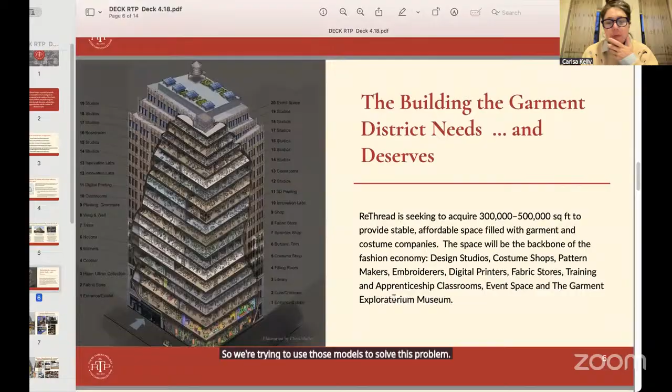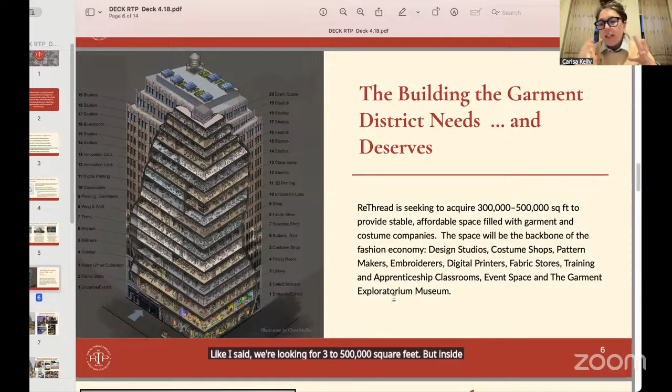We envision this as a building - we've looked at some specific buildings, though it doesn't have to be this one. Like I said, we're looking for 300,000 to 500,000 square feet. Inside is an idea of multiple hundreds of small businesses, and we'd love there to be a garment exploratorium, an interactive museum of some kind.

I don't know if any of you saw the exhibit Showstoppers done during the pandemic by the Costume Industry Coalition, but it had metrics taken from a woman who gauges museum exhibits, and it outperformed anything she'd done in 20 years. The key to that is it was very interactive in terms of pulling folks in, where you had makers in the space.

So the idea would be to pull in the history and showcase not only costumes, but fashion, and the impact of the Triangle Shirtwaist Factory fire. All of these buildings were purpose built. There's just a ton of history inside this district that we feel like we could really create a center that will pull tourism and bring people back into this industry.

And the city has also been talking about Industrial 5.0. We've invested a lot of money in terms of jobs where people needed master's degrees, and we're not working towards that. So inside the building would be all of these maker spaces, design spaces, this beautiful stuff that you see on the runway, the Met Gala in a couple of weeks. I know tons of shops that are making stuff for those and utilizing the district for all of these goods.

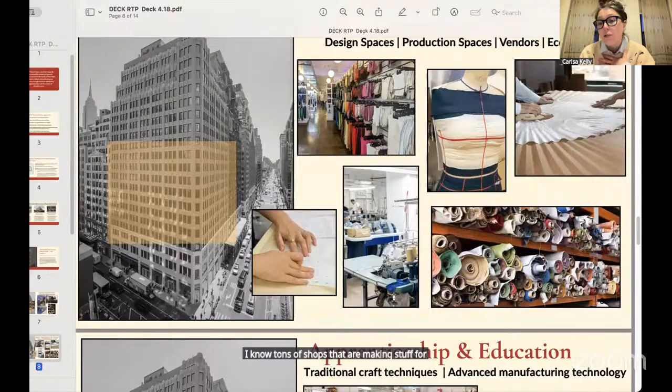I've had some successful apprenticeship programs, and I'm working with the state on a 2,000-hour costume track apprenticeship program, a state-certified apprenticeship program, that we would also hope to have flourishing inside this building.

In addition, most of the workers are women. This has generally been an immigrant community, and a track into middle class life inside New York. So highlighting all of those pieces — and we all need childcare, I have a 6-year-old — who wouldn't want an interactive place where you can also drop your child off, bringing a vitality to the district that we haven't really ever seen before. And showcasing, like I said, all of what the creative economy is in New York, what it can be and what it should be.

And the Garment District is not there by chance. Broadway is where it is because of the Garment District. FIT is where it is because of the Garment District. It's a well-established ecosystem that is interdependent on each other.

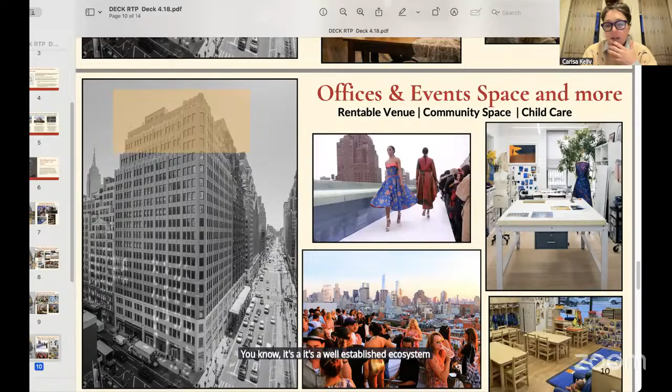Down the road — we're not asking for this today — we're going to be looking for capital funding from the city and the state to close the gap, so that if we buy it at market rate, it will remain affordable for the fashion and costume industry. We'll probably be using tax credits, conventional debt, and there may be some philanthropic components to it as well.

Yes, and we're in phase one, and I'll say we've had very, very promising conversations with a whole bunch of folks. We shouldn't hedge all our bets yet — we don't want to jinx anything by being too positive — but we're making a lot of headway speaking to a lot of city and state folks, as well as a whole bunch of city and state agencies, other community boards, and the players and BIDs in the district as well.